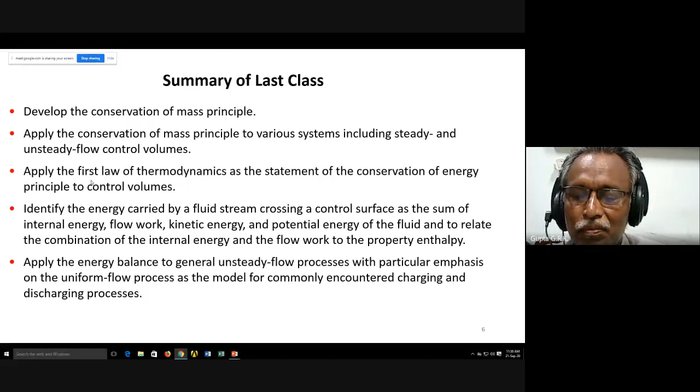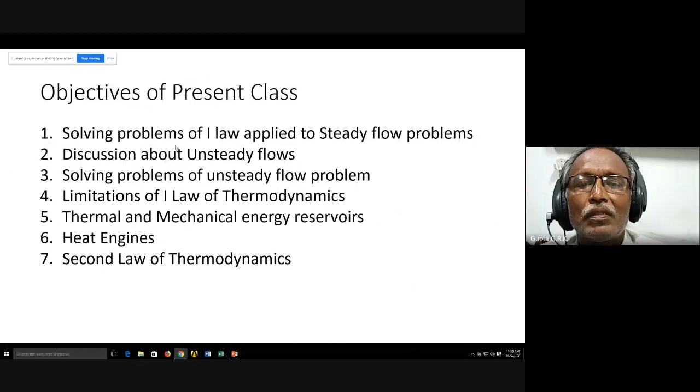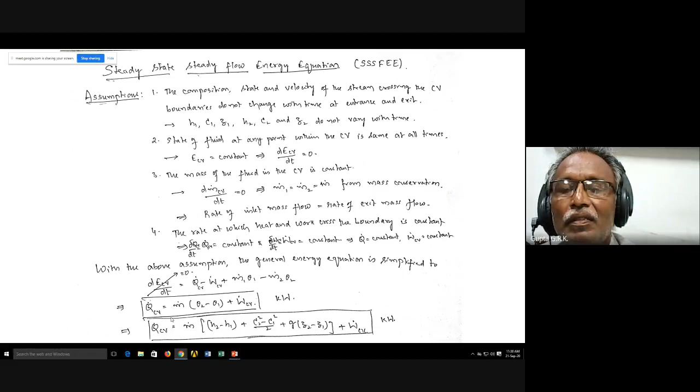We have seen some problems. We have done the steady state, steady flow energy equation, and application of SSSFEE.

Some more things here. It is given, electric heating of air in a house. Suppose I have a house and it is heated electrically using electricity, and some volume of air is coming and going. If you apply the conservation of energy equation, energy in minus energy out is the change of energy in the system, but assuming steady flow, this is zero.

So whatever energy is coming in, that is going out. E in is equal to E out. Energy crosses the boundary either through heat, work, or mass flow. So W dot in, the work input, plus M dot H1, the mass input, energy input through mass, is equal to how it is going out: through heat and again mass flow. So Q dot out plus M dot H2, assuming delta KE and delta PE are zero. So W dot in minus Q dot out equals M Cp (T2 minus T1), or M dot into (H2 minus H1), which is M dot Cp into (T2 minus T1).

So what data do I want? I want how much electricity is consumed to heat the room, how much heat is lost or leaked out of the room, and what is the volume flow entering and leaving. If I know the volume flow, I can get the mass flow by multiplying by the density. If they give mass flow directly, no problem. If they give volume flow, multiply by density. So you know M dot, Cp as 1.005, and T2 and T1.

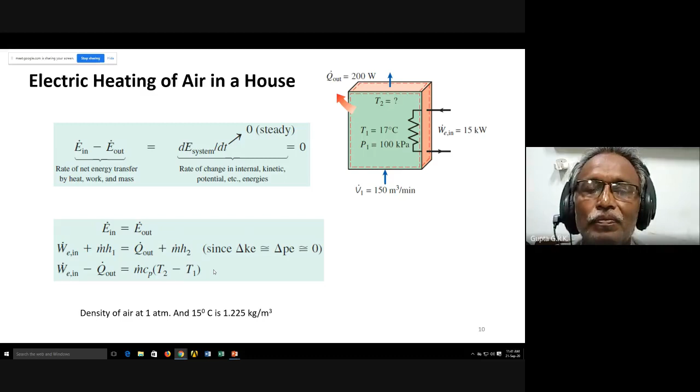As I told in the last class, Cp is taken to be constant, but Cp may vary because entry air may be minus 20 degrees centigrade and leaving air may be 70 degrees centigrade, so Cp may not be constant. If I take constant Cp of 1.005, I may get less than 0.5% error, which is negligible, so I can always assume the ideal gas to be a perfect gas.

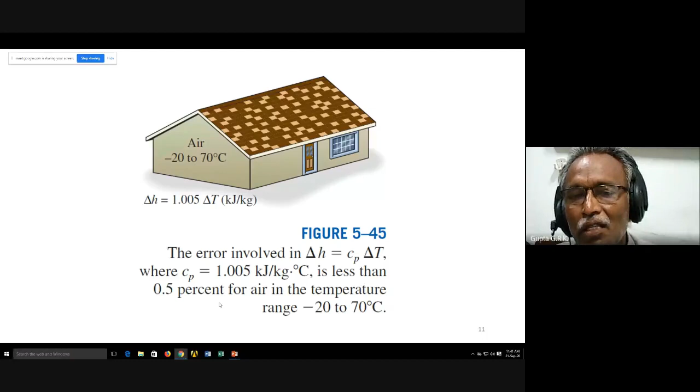These are the problems we have seen in the last class: pure substance and closed system. When a rigid tank is there with a liquid-vapor mixture of water, and if its pressure is reduced, what is the heat transfer? That we have done.

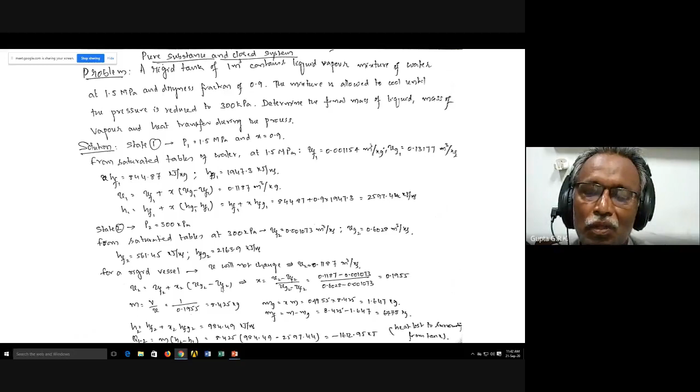Another problem we have done, again with pure substance and closed system, a constant volume process, where the state is initially superheated and the temperature is reduced to 80 degrees centigrade, and we found the heat transfer. This was the second problem we have done.

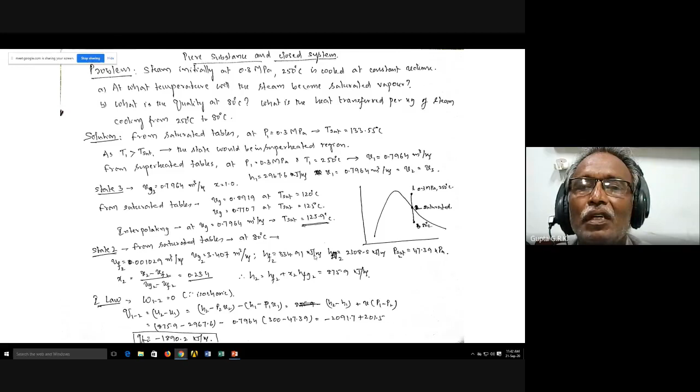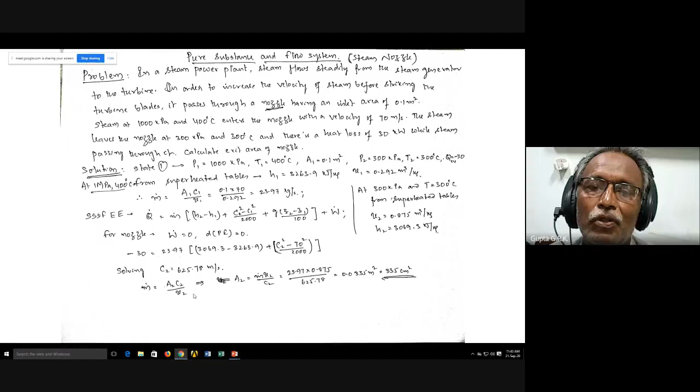Then, if I take air for a flow system: first law applied to a control volume for an air compressor problem. If I take an air compressor, and this is the energy equation, I have to see what data are given. If Z1, Z2 are given, you use that. C1, C2 are given, you use them. Enthalpies given, you use them. Or Q dot, W dot, whichever data are there, we substitute.

And if neither of the two are given, you can neglect it, and whatever is the unknown can be calculated from the known values.

Here it is given: air flows steadily at the rate of 0.5 kg per second, the mass flow through an air compressor, entering at 7 meters per second velocity, 100 kilopascal pressure, and 0.95 meter cube per kg volume. So you are given velocity, pressure, and volume at the inlet, and leaving at 5 meters per second, 700 kilopascal, and 0.19 meter cube per kg. The same three are given at the exit also.

The internal energy of the air leaving is 90 kilojoule per kg greater than that of air entering. So change in internal energy is given. Here enthalpy is not given directly. Enthalpy is important, so instead of H2 minus H1, you can write U plus PV: U2 plus P2V2 minus U1 plus P1V1. So U2 minus U1 is given as 90 kilojoule per kg.

And cooling water in the compressor jackets absorbs heat at the rate of 58 kilowatts. It is losing heat 58 kilowatts, that is Q dot. Because it is losing, it is minus 58. And we compute the rate of work transfer: how much work is to be given to the compressor to get the air whose energy increases this much and loses heat this much.

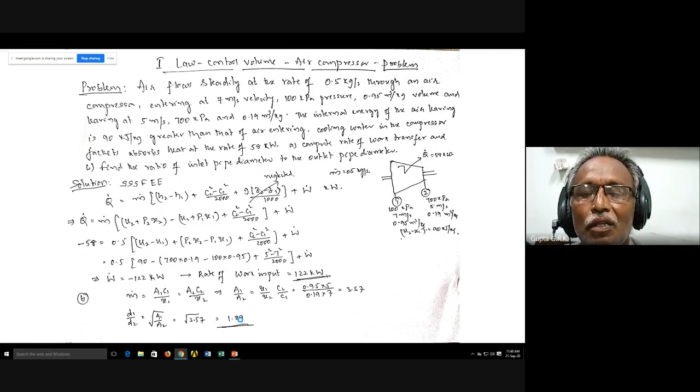Now one more problem we will see. This is a problem with three components: heat exchanger, turbine, and nozzle. Air at 15 degrees centigrade passes through a heat exchanger with a velocity of 30 meters per second, when its temperature rises to 800 degrees centigrade. The inlet conditions are given: temperature and velocity. So at point 1, C1 and T1 are given. After the heat exchanger, the temperature rises to 800 degrees centigrade, so T2 is given as 800 degrees centigrade.

Here I have to find the heat transfer. You are asked to find the heat transfer to raise the temperature from 15 degrees centigrade to 800 degrees centigrade. The air then leaves,

it then enters a turbine at 30 meters per second — velocity is given — and expands until the temperature falls to 650 degrees centigrade. Here there is a temperature fall, which means enthalpy is reduced, so work is obtained by spending enthalpy here. I have to find W dot from the turbine.

Then the air leaves the turbine at 60 meters per second and enters a nozzle, expanding until the temperature falls to 500 degrees centigrade. So T3 and C3 are given at entry, and at exit the temperature is given as 500 degrees centigrade. I have to find the velocity at the exit.

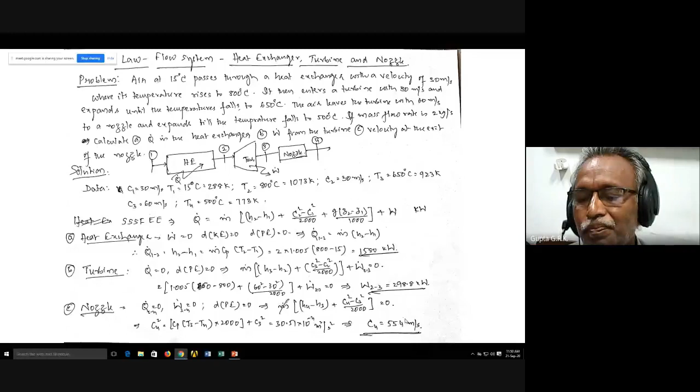So basically, I have to consider the whole SSSF energy equation. And there could be work done in nozzle? No, nozzle never does any work, it just expands. Here work means external work, external work means usually shaft work, so nozzle will not do any work. Boiler will not do any work. Condenser will not do any work. Usually the work transfer will be done in pumps, compressors, where there is negative work, and turbines, IC engines, these will give positive work. Where there is a shaft rotating, that we call external work. Nozzle, diffuser, boiler, condenser, heat exchanger, mixing chamber - in all these cases there will not be any work transfer. Is it clear? Okay.

Then we go to what is called unsteady flow process. We have derived and simplified for steady flow - we have cancelled dmCV by dt and dECV by dt. Because for steady flow, there will not be any change of mass of the control volume and change of energy of the control volume. So dECV by dt equal to 0, dmCV by dt equal to 0. That is, mass of the control volume remains constant, energy of the control volume remains constant.

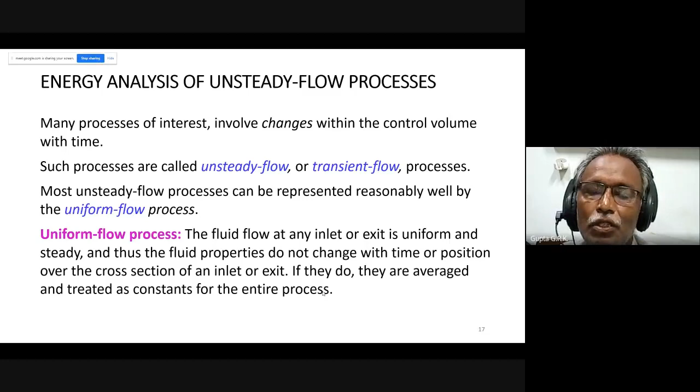Charging of a rigid tank from a supply line is an unsteady flow process since it involves changes within the control volume. I am charging it, so some mass enters here.

What I am telling as uniform means the properties do not change at the entry, and along the diameter also it should not change. It is the same throughout. Actually, in fluid mechanics, you will know that there will be a boundary layer developed in the pipe, and there will be velocity change across the pipe. So like that, but we assume it is uniform.

That is an assumption for uniform flow. We assume the properties are steady and uniform at the inlet, and if there is an exit, at the exit as well. That is uniform flow.

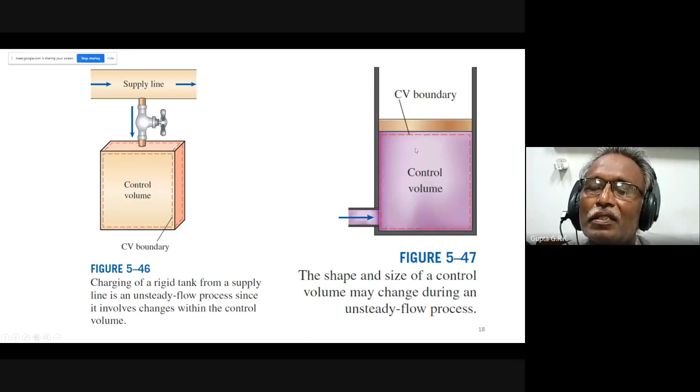Here there is only entry. So some mass enters, and some energy with mass also enters into the control volume, due to which there will be an increase in the mass and also the energy. So also the shape and size of the control volume may change in an unsteady flow process. If I have only a piston, and mass enters, the boundary moves, it expands. So that also need not be a fixed boundary.

Mass balance, energy balance, this we have done. The only thing is E in minus E out is equal to delta E system. But delta E system, there is a change in the energy of the system. Change in the energy of the system is equal to M2E2 minus M1E1, where E is U plus KE plus PE.

But usually for the control volume within the mass, the kinetic energy and the potential energy are 0. So instead of M2E2 minus M1E1, I can write M2U2 minus M1U1. So Q minus W is equal to sigma m h out minus sigma m h in plus M2U2 minus M1U1.

Q is net heat transfer into the system. W is net work transfer from the system. So Q is equal to Q net, Q in minus Q out, because it should be positive. Similarly, W net out we want, so W out minus W in. Work done by the system minus work done into the system is net work done by the system, which is positive. So here, this is a positive number.

This is a positive number, that is net heat into the system. This is net work done by the system. When you are doing the problem, I have to write this equation, but when W is negative, it will become minus of minus and it will become plus. If Q is negative, it will become minus Q like that.

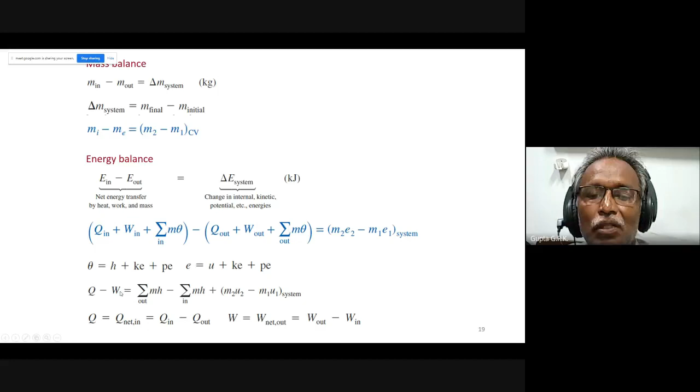The energy equation of a uniform flow system reduces to that of a closed system when all the inlets and exits are closed. If I don't have inlets and exits, it will become just like Q minus W is equal to delta U. So just if you see here, this is 0, this is 0. So Q minus W is equal to delta U.

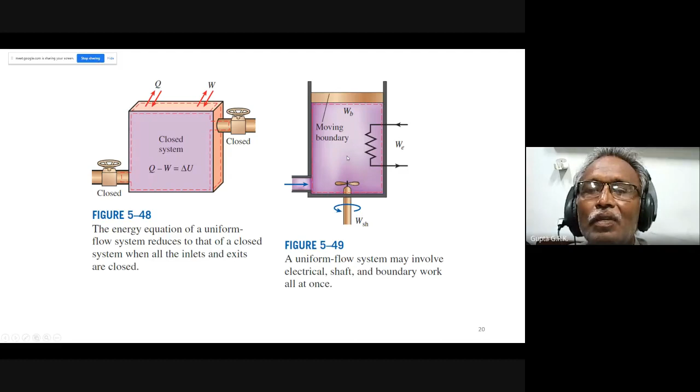A uniform system may involve electrical, shaft and boundary work all at once. Just like a closed system, here also in an open system, you can have all energy transfers. I can have shaft work here, I can have electrical work here, I can have a moving boundary here. So everything can be there. We'll see some more things. And here mass balance and energy balance are the same things. I need not show here.

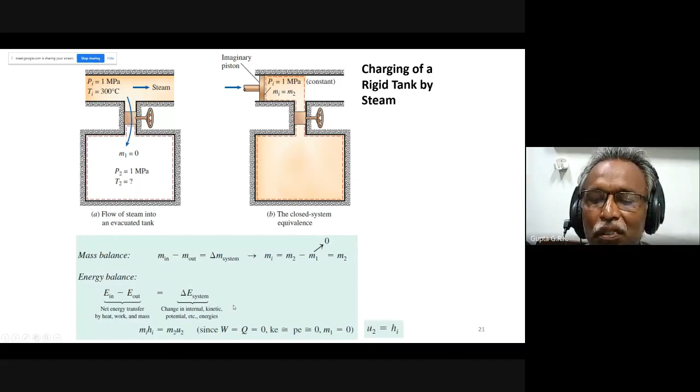Similar examples, and we will see one problem. This is an application of unsteady flow and discharge of heated air at constant temperature. So I have a room with some volume, pressure and temperature. Some air is there in those conditions, and I am heating it with a coil, so electrical work is input.

An insulated 8-meter cube rigid tank contains air at 600 kilopascals and 400 Kelvin. A valve is connected to the tank. If it is now opened, air is allowed to escape until the pressure inside drops to 200 kilopascals. So it is an unsteady flow. We are getting the mass decreased, and some energy and mass are leaving the system through the valve. So it is completely unsteady flow.

At the second state, the property given is 200 kilopascals, and the temperature is maintained constant. This is another property given because I know the initial temperature and the final temperature is given to be the same, and it is maintained constant by an electric resistance heater placed in the tank. Because of some energy leaving, the temperature may fall, so I try to maintain the temperature by supplying electrical current.

We have to determine the electric energy, how much energy is to be supplied. So initial conditions: volume, pressure, and temperature are given. Final condition: pressure is given. So the mass flow, you can find out, Mi equals PiVi by RTi, and it is 41.81.

Any doubts? Any doubts in the problem?

Okay, otherwise the first law things are over, so we have to see what are the limitations of the first law of thermodynamics. In the first class, you people were told there is second law of thermodynamics, third law of thermodynamics, and so on. So when first law of thermodynamics is dealing with everything, why do we need second law of thermodynamics?

Some of the examples we will see. Before that, I will tell you a small story. Suppose I wanted to go to some temple like Yadagiri Gutta. I went with family, so I went to the petrol pump with a car, and I purchased some liters of petrol and filled it.

So what did I purchase? I have purchased chemical energy. I have so much mass of fuel, and I know what is the calorific value of the fuel. So mass flow into calorific value—I have so much chemical energy available with me, and that I am taking with the car.

Now I switch on the engine, so the petrol gets burnt in the combustion chamber. So what happens? The chemical energy is converted to thermal energy by combustion. What is the amount of heat released? It will be the same amount of kilojoules as whatever chemical energy I have, because energy can neither be created nor destroyed. So I got an equal amount of kilojoules of thermal energy, and this thermal energy pushes the piston down.

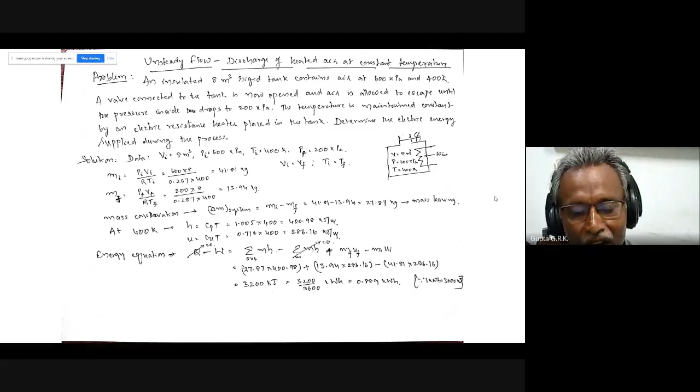Actually, the first law will not deny any of my statements as long as the energy is constant. There is no energy created or destroyed; the same amount of energy I'm taking, and I am coming back with the same amount of energy. So the first law accepts everything, but we know that some of these things are not possible. You will laugh at it. How can this be possible? Am I right?

In the last problem, somebody asked why we are not considering kinetic energy and potential energy of air. So the air within the control volume, as I told you, potential energy and kinetic energy are macroscopic properties. Some air is entering and leaving, so we consider kinetic energy and potential energy because they enter at some altitude and leave at some altitude, enter at some velocity, leave at some velocity, so they have some kinetic energy available. But just like a closed system, when you have a closed system, we are not considering kinetic energy and potential energy.

That is the same way in the control volume also: the mass within the control volume will not have any kinetic energy and potential energy. It will have only internal energy. When you consider the energy of the fluid that is there within the control volume, there is only internal energy. Is that clear?

Satish? Okay, Ram Beniwal. It's okay, right?

So in the same way, when we did the closed system, we wrote delta Q equals dU plus delta W. No change of potential energy and kinetic energy was considered there. This is the same way: the control volume is fixed, the fluid within the volume is fixed, some mass is entering and leaving at different potential energy and kinetic energy. That's why I'm finding the difference of potential energy and kinetic energy at the entry and exit, but not the kinetic energy and potential energy of the fluid within the control volume. Okay, right.

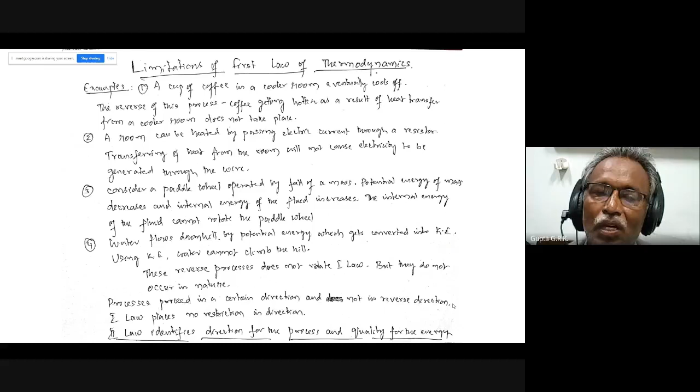So we will see the same examples here. A cup of hot coffee does not get hotter in a cooler room. Transferring heat to a wire will not generate electricity. And transferring heat to a paddle wheel will not cause it to rotate.

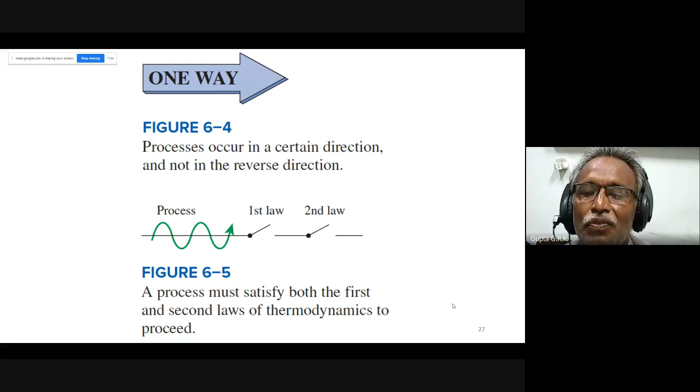Processes occur in a certain direction and not in the reverse direction. A process must satisfy both the first and second law of thermodynamics to proceed.

So what is the use of the second law? Second law identifies the direction of process. Second law asserts that energy has quality as well as quantity. First law deals with only quantity - second law deals with quality.

The first law is connected with the quantity of energy and the transformation of energy from one form to another, with no regard for its quality. Second law provides the necessary means to determine the quality as well as degree of degradation of energy during the process.

So second law of thermodynamics is also used to determine the theoretical limits of the performance of commonly used engineering systems such as heat engines and refrigerators, as well as predicting the degree of completion of chemical reactions. It says if you have a heat engine, it can have efficiency only up to a certain limit - it cannot have 100% efficiency. It puts a limit on the performance, right? So that's what second law does.

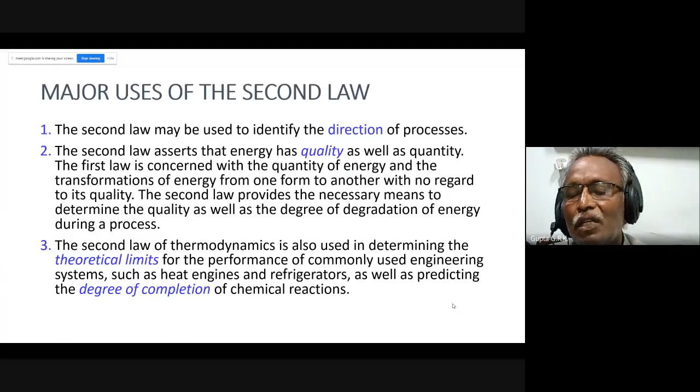So before going to the second law, we have to talk about what a heat engine is. To understand heat engine, first I have to define thermal energy reservoirs. A thermal energy reservoir is a body of infinite heat capacity. We call it infinite heat capacity or infinite large thermal energy capacity. Heat capacity means mass into specific heat, m times Cp.

So that is infinite - meaning very large - meaning you can supply or absorb finite amounts of heat without undergoing any change in temperature. That is, from a reservoir, whether you supply so much heat or remove so much heat out of it, its temperature will not change because m Cp is very large, right? If I want to have a 1 degree change in temperature, I have to put in or remove an infinite amount of heat. Then only can I bring about a 1 degree Kelvin difference.

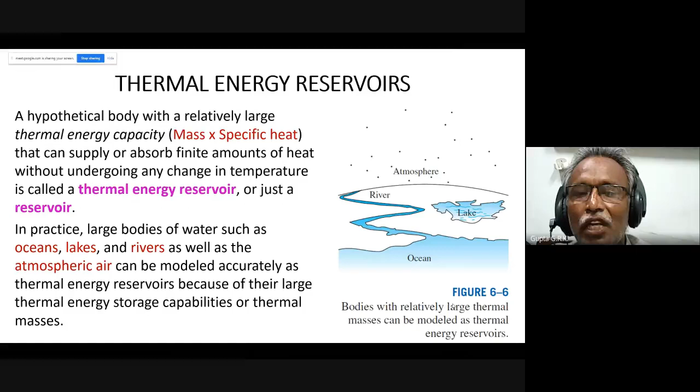So these are also called constant temperature reservoirs. They are constant temperature reservoirs, and there are two types: high temperature reservoirs and low temperature reservoirs. In the next slide they are called sources and sinks. They are classified into high energy reservoirs or high temperature reservoirs, which are also called sources, and low energy reservoirs or low temperature reservoirs, which are called sinks.

Examples for sources: solar energy, oil furnace like a blast furnace, boiler, combustion chamber of a gas turbine, boiler of a steam turbine, nuclear reactor. All these we consider as high temperature reservoirs, right?

Always we assume its temperature is constant. Similarly, sinks are there. From high temperature sources, though the engine or turbine takes away heat from the boiler, still we assume its temperature remains constant, because there will be continuous heat supply and heat taken away. That's why its temperature remains constant.

So whenever it is a source of energy supply with a constant temperature, it is an energy reservoir. High temperature reservoirs are these sources, and low temperature reservoirs are those to which normally heat is rejected or taken away without change in temperature. Large oceans, lakes, rivers, atmosphere - all these are considered sinks or low temperature reservoirs. So whatever heat you leave into that, its temperature will not change.

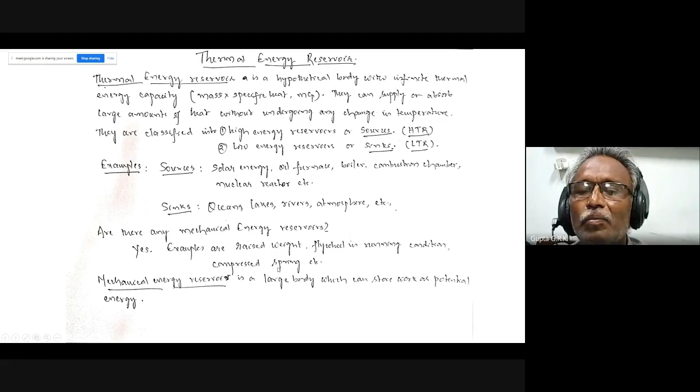Similarly, are there any mechanical energy reservoirs? In some books it will not be given, but as mechanical engineers we have to know there are mechanical energy reservoirs. Examples are raised weight, flywheel in running condition, compressed spring, etc. These have a large body which can store work as potential energy. An energy reservoir is nothing but something which stores energy and supplies it when you want. So these are mechanical energy reservoirs: raised weight, flywheel in running condition, and compressed spring.

Then come to the heat engine. It is a device that converts heat into work. They receive heat from a high temperature reservoir, that is the source, convert part of this heat to work, and reject the remaining waste heat to a low temperature sink. And they operate in a cycle - this is also an important point. So they take heat from a source, convert part of it to work, reject remaining heat to the sink, and operate in a cycle.

Work can always be converted to heat directly and completely, but the reverse is not true - not all heat can be converted to work. So heat is equal to work: if I am spending work this much, it will be completely converted to heat. But if I am spending heat this much, the work we get will be less than that. Some heat has to be lost - all the heat cannot be converted to work.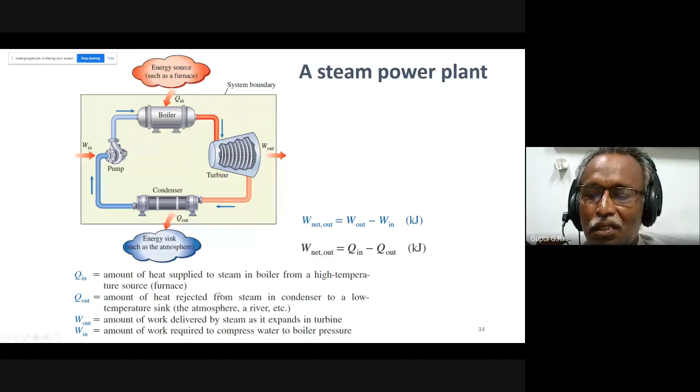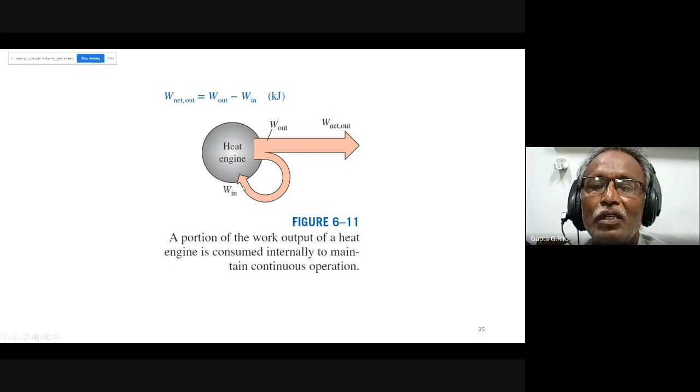We know that for a cycle, the net heat transfer is equal to net work transfer. So W net out is equal to Q in minus Q out, which is also equal to W out minus W in - these are the formulae, you can just read them. So W net out equals W out minus W in. From the heat engine, so much work is coming, but some of it is spent to run the pump, and the remaining is the net output.

So thermal efficiency is whatever I am getting out of it and whatever I am spending for it: net work output by total heat input. So W net out by Q in. And W net out, we already know that net heat transfer equals net work transfer, which is Q in minus Q out. If I substitute that, I get 1 minus Q out by Q in. So the fraction of the heat input that is converted to net work output is a measure of the performance of the heat engine, and is called thermal efficiency. For a given heat input, how much of it I have converted to work, that is the efficiency.

So here in this example, 100 kilojoules is the heat input, and 80 kilojoules is wasted. Suppose I have a heat engine which takes 100 kilojoules from the source and loses 80 kilojoules, then the net output is Q in minus Q out, which is 20 kilojoules. If I can have a better heat engine which loses less heat by improvement of design, if it takes the same amount of heat from the source but loses only 70 kilojoules to the sink, the net output will be 30 kilojoules, giving 30% efficiency. That is how we calculate efficiency and compare engines to see which has better efficiency.

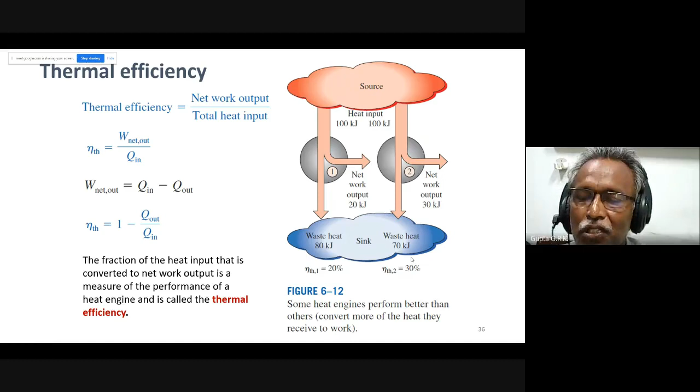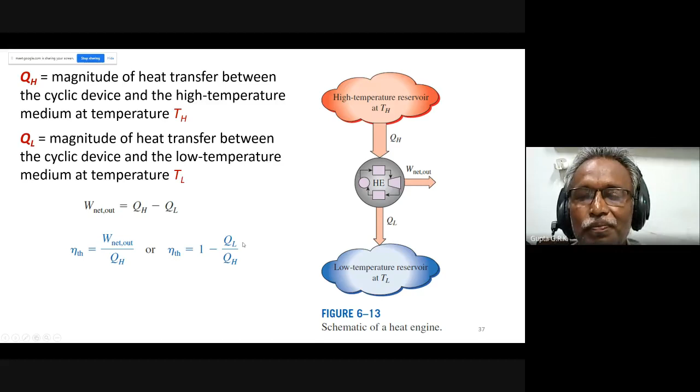So QH and QL: QH is the magnitude of heat transfer between the cyclic device and the high temperature reservoir, and QL is the magnitude of heat transfer between the cyclic device and the low temperature reservoir. W net out is QH minus QL. So 1 minus QL by QH is the thermal efficiency of a heat engine. For example, if QH is 100 megajoules and QL is 45 megajoules, the net output is 100 minus 45, which is 55, and the efficiency equals 55 by 100, so 55%.

So can we save Q out? As I told you, if I can reduce Q out, I can improve the efficiency. In a steam power plant, the condenser is the device where large quantities of waste heat are rejected to rivers, lakes, or the atmosphere.

Can we not just take the condenser out? Since I'm losing heat and my efficiency is getting reduced, if I remove the condenser and directly connect it, I can save all the waste energy. Unfortunately, the answer is no, because unless that heat rejection is there, the cycle cannot be completed. If you draw the Rankine cycle on a PV diagram or a TS diagram, you cannot have a cycle by removing the condenser.

If I remove the condenser, it becomes an open cycle. After the turbine, the steam goes out, so I cannot have fresh water to complete the cycle. If I want to complete the cycle, the same water has to be cooled to the original temperature at the beginning state. So I have to cool it, I have to lose heat. Every heat engine must waste some energy by transferring it to a low temperature reservoir in order to complete the cycle, even under idealized conditions.

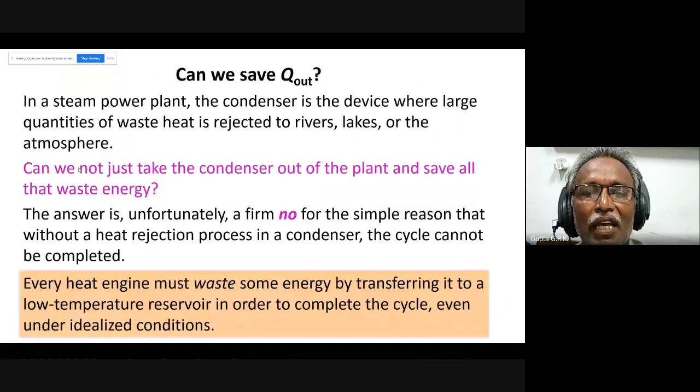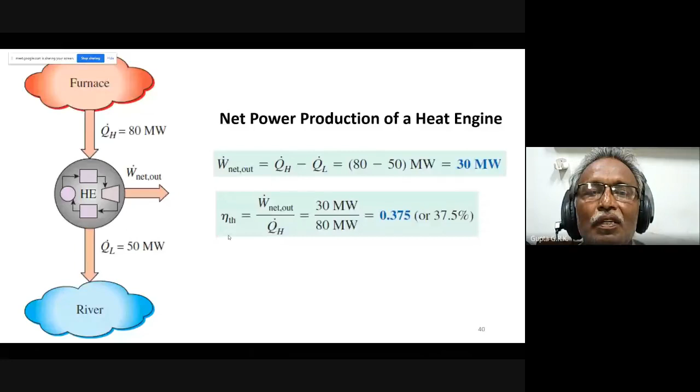So as I told in the previous one, can I have this without this condenser or sink? Kelvin and Planck together say that is not possible. It is impossible for any device that operates on a cycle to receive heat from a single reservoir and produce net amount of work. Supply is there, work is there, without sink.

And QL, I want to make it 0. If QL is 0, what happens to efficiency? 1 minus QL by QH, so efficiency will be 100%. So a 100% efficiency engine is not possible. A 100% efficiency engine is also called a Kelvin Planck violator.

And this is also called PMM2, perpetual motion machine of the second kind.

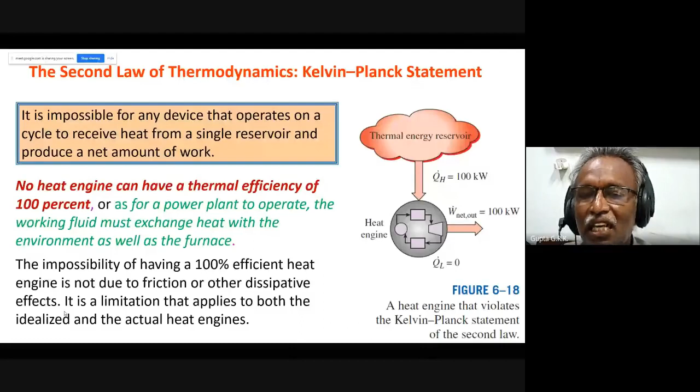So for a power plant to operate, the working fluid must exchange heat with the environment as well as the furnace. The impossibility of having a 100% efficient heat engine is not due to friction or other dissipative effects. It is a limitation that applies to both idealized and actual heat engines. It is nature, or God, whatever you say, that doesn't allow you to have an engine which is 100% efficient.

And at the same time, we have the opposite of a heat engine, which we call a refrigerator and heat pump. The transfer of heat from a low temperature medium to a high temperature medium requires special devices called refrigerators.

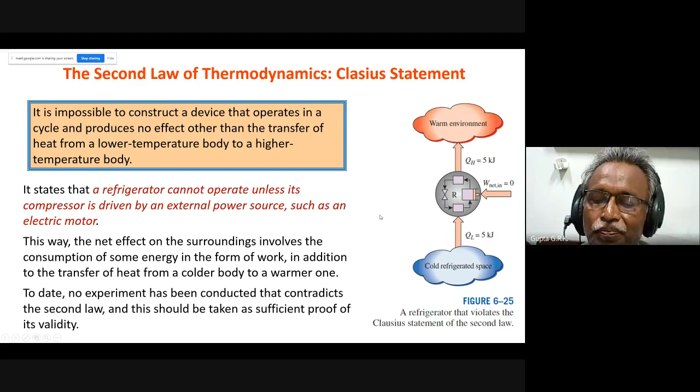So here, actually, if I am taking QL, and this W, if suppose I am spending some positive work here, then this QH will be the total of these two. QH will be QL plus W.

So these are refrigerators and heat pumps. The transfer of heat from a low temperature medium to a high temperature medium requires refrigerators. Refrigerators, like heat engines, are cyclic devices. The working fluid here is called the refrigerant.

And in BME, you might have studied about the most frequently used refrigeration cycle, the vapor compression refrigeration cycle. It also has 4 components, and heat is given from the refrigerated space. Heat is taken from the low temperature reservoir, and the high temperature reservoir is the outside atmosphere, it is losing heat here. So there is heat in and heat out.

In the same way, there is compression here through a compressor, and there is a throttling valve or expansion valve where expansion takes place. So again, all four will be there, only the cycle will be in the opposite direction.

Another important point to remember: a work producing device works in a clockwise cycle. A work absorbing device, like a refrigerator and a heat pump, works in an anti-clockwise cycle. We will discuss this in detail in the next class.

So, understand the principles of refrigerator, heat pump, and heat engine, and see how the performance is calculated. What is the difference between a refrigerator and a heat pump? Recollect these things, check from your BME notes or whatever it is.

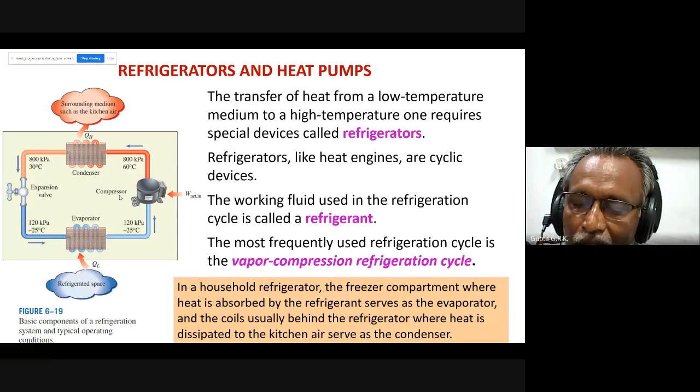Any questions? Okay, pump can't pump steam, that's right. So either compressor, or we'll have a pump in a steam power plant. Pump pumps water, not steam, because water and steam are the same working fluid, just changing phases. Expansion takes place for steam and compression takes place for the pump.

Okay, here's a question from previously. The heater is turned on after opening the valve, or before opening the valve? So both are taking place simultaneously, that's it. Only one is not taking place.

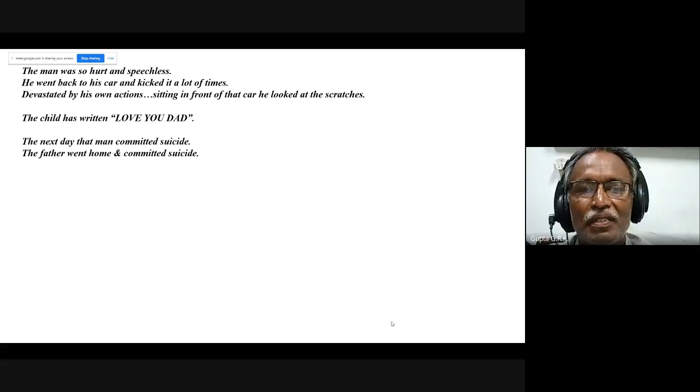Think about this story the next time someone steps on your feet or you wish to take revenge. Whenever you become angry, you will not be in control of yourself, the mind dominates. So think first before you lose your patience with someone you love. That is important. Machines can be repaired, but broken bones and hurt feelings often cannot be repaired. Too often we fail to recognize the difference between the person and the performance. We forget that forgiveness is greater than revenge.

People make mistakes, we are allowed to make mistakes. But the actions we take while in a rage will haunt us forever. Pause and ponder, think before you act. Be patient, forgive and forget. Love one and all. Thank you.